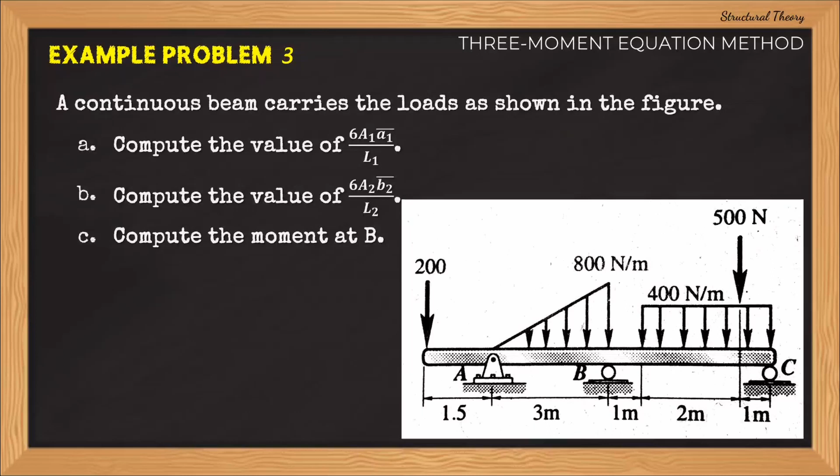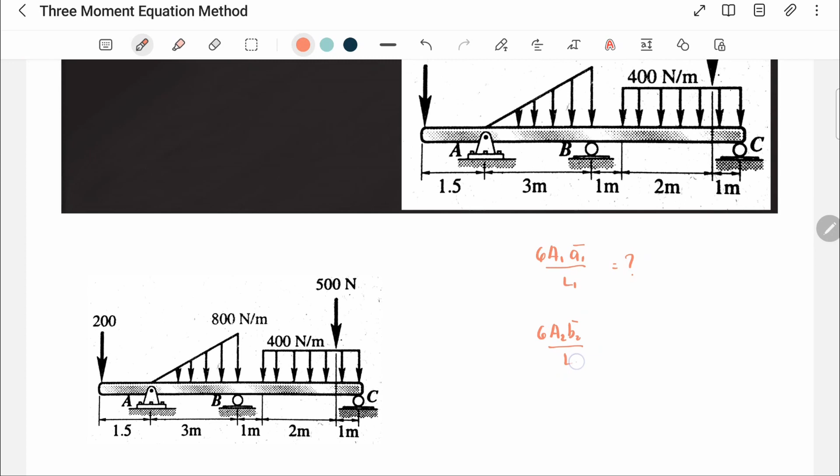So let us solve this problem, guys. Ito nga yung ating problem. Ang una natin kailangan i-solve according to the problem is yung value ng 6A1 bar A1 over L1. Yung pangalawa ay kailangan natin i-solve yung value ng 6A2 bar B2 over L2. Tapos yung pangatlo, kailangan doon natin i-solve yung moment at B.

This is a continuous beam, so meron tayong dalawang span dito. That is yung span AB, ito yung ating first span. This is span AB, so ito yung ating L1. And yung ating second span is yung span BC, so ito yung ating L2.

Kung mapapansin natin, meron tayong overhang dito sa may after sa support A. Hindi natin ito matatawag na isang span, kasi pag sinabi nating span, that means bounded siya dapat ng dalawang supports. So hindi ito span, this is just an overhang.

Ang una natin gawin guys, para ma-solve nga yung moment at B, kasi parang moment at B yung ating final dito na parang kinukuha. Para ma-solve natin yung moment at B, kailangan natin gumawa ng 3-moment equation.

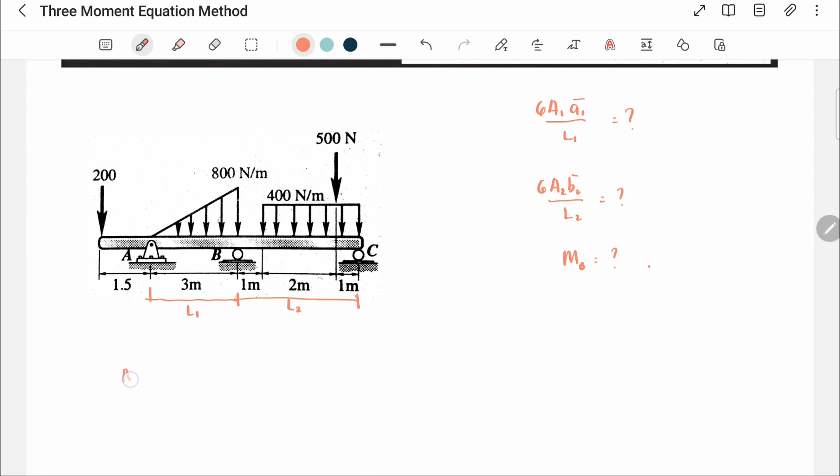Yung ating first term dito para sa ating 3-moment equation is moment A multiplied by L1, plus yung ating second term is 2 moment B multiplied by L1 plus L2, plus yung ating third term is moment C multiplied by L2, plus yung ating fourth term is 6A1 bar A1 over L1, plus 6A2 bar B2 over L2, equal to 6EI multiplied by H1 over L1 plus H2 over L2.

Yung ating unang kailangan kunin dito is yung ating value ng 6A1 bar A1 over L1. Itong term na ito yung ating unang kailangan kunin. Kunin muna natin guys yung term na ito.

Yung segment na tinutukoy niya guys is obviously itong segment na ito. Ito na nga guys yung ating first segment. Kinopya ko lang para hindi tayo maguluhan. Yung ating load dito is a triangular load.

Ang kailangan natin dito makuha guys is yung value ng 6A1 bar A1 over L1. Ang pinakamadali dito, method 1, method 2, or method 3, ang pinakamadali is yung method 1 kasi meron tayong formula na readily available para sa common loading na ito - triangular load all throughout the span. Meron tayong formula para dito, at kung naalala nyo, yung ating formula para dito is equal to 8 over 60 WL cube.

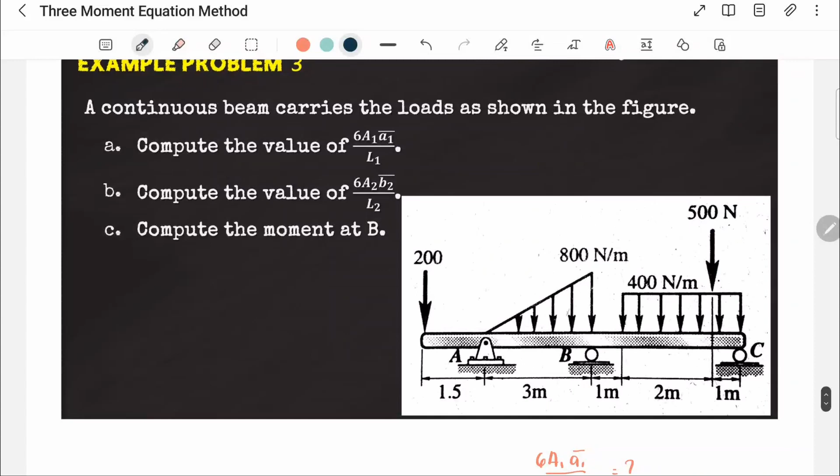I-compute lamang natin guys. 6A1 bar A1 over L1 - yung ating makukuha dito ay 2,880, and this is in Newton meter square. Ito na yung sagot sa letter A. Nakuha na natin yung letter A - this is 2,880 and this is in Newton meter square.

Okay, so dito na tayo sa letter B. Ang kailangan natin kunin dito is the 6A2 bar B2 over L2. Nasa second span yun guys. Kopyahin natin yung second span - ito na nga yung ating second span.

Para dito guys, hindi natin pwedeng gamitin dito yung method 1 kasi walang formula na pwedeng gamitin na directly applicable for this type of loading. Meron tayong uniformly distributed load dito, kaya lang hindi siya all throughout the span. At itong concentrated load, pwede lang natin siyang gamitan ng formula, pero again, para lang yun sa concentrated load. So ang kailangan natin dito ma-compute is again the 6A2 bar B2 over L2.

Okay, so ang gagawin natin dito guys is ihiwalay natin yung effect ng concentrated load sa uniformly distributed load. Ang ating gagamitin dito is yung method 3 kasi mas okay gamitin compared sa method 2, para hindi na tayo nagko-compute ng mga vertical reactions. Sandali, papalitan ko muna ng drawing ito para hindi magulo yung ating figure.

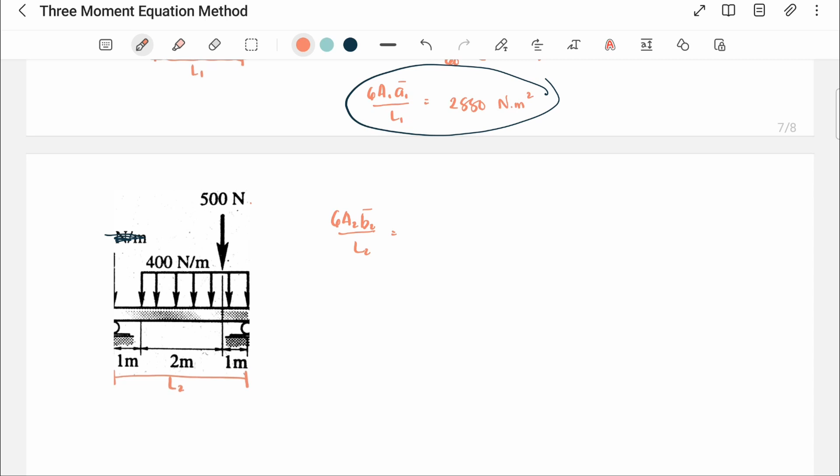So ayun na nga guys, ito nga yung ating figure, pinalitan ko lang siya. So ito yung ating span 2. Again, this is our L2 and this is equal to 4 meters.

Ang gagawin natin dito is gagamitin natin yung ating formula para sa 6A2 bar B2 over L2, ating gagamitin dito is PB over L multiplied by L squared minus B squared. Pero since dalawa yung atin ditong load, meron tayong concentrated load at meron tayong uniformly distributed load.

So yung 500 Newton na concentrated load, ida-direct natin siya na substitution. Pero yung 400 Newtons per meter ay gagawin natin siya, i-integrate natin siya. Kukuha tayo ng strip at saka i-integrate. So bali ganito yung mangyayari guys, PB over L, L squared minus B squared, ito is para sa concentrated load, plus integral of PB over L, L squared minus B squared para naman doon sa uniformly distributed load.

Okay, so unahin muna natin yung ating concentrated load. Ang ating P dito is 500 multiplied by B. Ang ating B dito is yung 1 meter. So 1 divided by L which is 4, multiplied by 4 squared minus 1 squared.

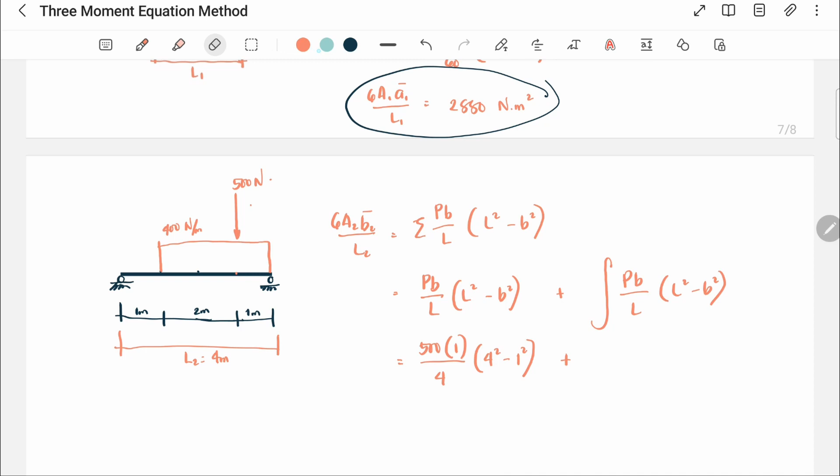Plus, ngayon, ang gagawin naman natin is kukuha tayo ng strip sa ating uniformly distributed load. So ito yung ating strip. Itong strip na to ay tatawagin natin y ito, at ito is of course the dx. Itong x na to, bali ito is equal to 4 minus x.

Okay, so ano ba yung y? Tama bang sabihin that y is equal to 400? Bakit? Kasi nga, uniformly distributed load man to, hindi natin kailangan mag-ratio and proportion para makuha si y in terms of x. So yung ating y is still 400 kasi yung ating height nitong load na to is constant and it is 400.

So bali guys, yung ating P dito, equivalent na P nitong ating strip, vertical strip, is equal to y dx, or that is equal to 400 dx. So again, yung 400 dx is itong equivalent na load nitong ating strip. Okay, so bali guys, all we have to do is integrate.

So integral of, yung ating P dito is 400 dx multiplied by B. So yung ating B is 4 minus x, L natin is 4, then L natin is 4 squared minus 4 minus x squared. So kailangan nating maglagay ng limit. Yung ating limit of course is yung ating x. Take note, yung ating uniform distributed load ay nag-start lamang siya dito sa point na to at nag-end dito. So yung ating limit is 1 until 4.

Okay, so all we have to do is i-compute muna natin itong nasa una. Itong nandito sa una is 1,875 and this is in Newton meter square, plus itong pangalawa. Itong pangalawa natin is 5,175 and this is in Newton meter square pa din. So we are going to add that and that is 7,050 Newton meter square.

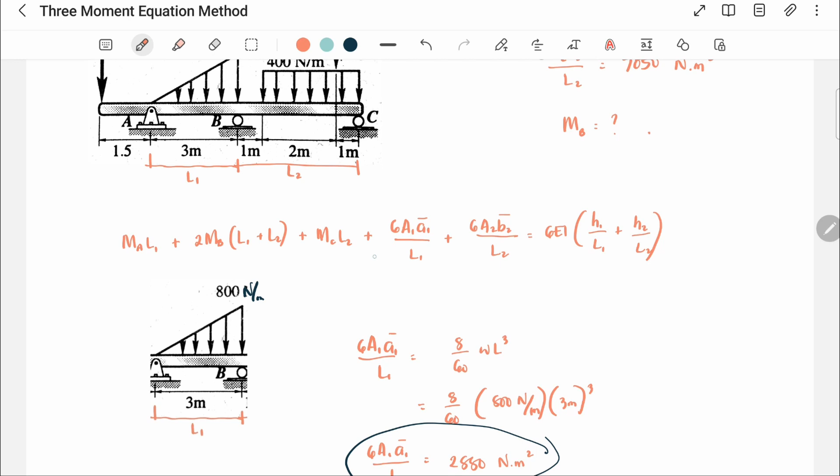Okay, so isa na lang yung ating kailangan ditong i-compute, that is yung moment sa B natin. Balikan natin guys yung ating formula, yung ating 3-moment equation kanina. So that is moment A multiplied by L1, plus 2 moment B multiplied by L1 plus L2, plus moment C multiplied by L2, plus ito at saka ito na nakuha na natin.

Okay na ito guys, nakuha na natin ito at saka ito. Take note na yung H1 at saka yung H2 ay mangyayari lamang na magkakaroon sila ng value kapag nagkaroon ng settlement sa mga supports. Nasabi ko yan sa pinakaunang video natin ng 3-moment equation. Magkakaroon lamang ng value yung H1 at H2 kapag meron tayong settlement.

Kasi yung H1 is the vertical distance between the left at saka sa middle support, at yung H2 is the vertical distance between the right and the middle support. Ayun, so ang nangyari dito guys is walang minention sa problem na nagkaroon ng settlement. So in other words, H1 at saka H2 natin ay 0.

Kung H1 at saka H2 natin ay 0, ibig sabihin 0 itong nandito sa loob ng parentheses, and therefore 0 yung lahat ng nandito sa may right side. Nasabi ko din to kanina sa first part ng 3-moment equation na kapag yung ating beam ay nag-end dito sa may support mismo, sa may roller o kaya sa may hinge, ang ating moment dyan ay magiging 0. So ang moment C natin is 0, kapag 0 yung moment C multiplied by L2, ito ay magiging 0 na term.

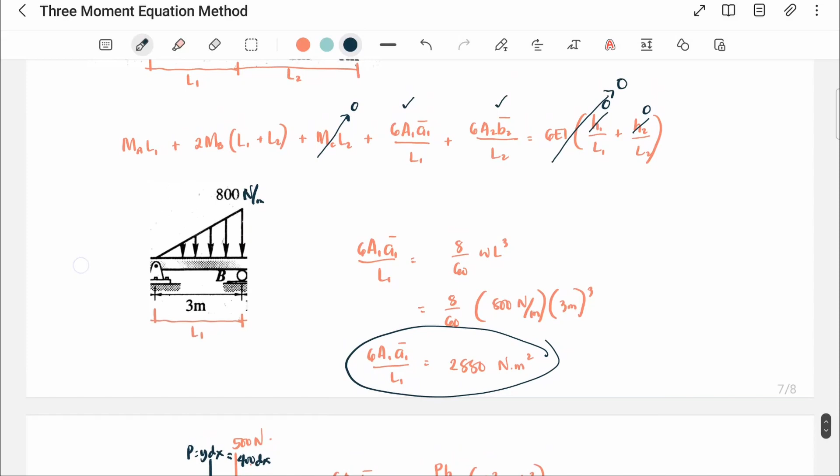Bali guys, ang matitira na lamang natin na term sa equation ay: moment A, L1, plus 2 moment B multiplied by L1 plus L2, plus 6A1 bar A1 over L1, plus 6A2 bar B2 over L2, equal to 0. Ito na lang guys yung ating natira, kasi yung iba ay na 0 na.

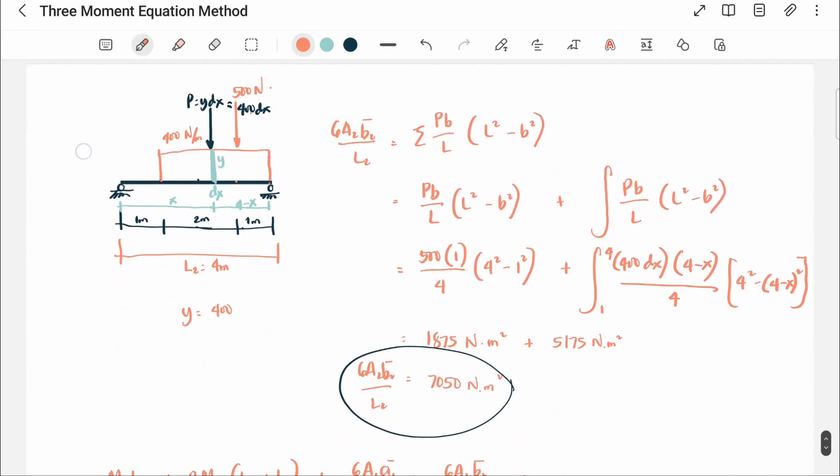Yung hinahanap natin sa pangatlo is yung moment sa B. Meron na tayong value ng L1 tsaka L2. So ang atin na lang problema, para makuha natin si moment sa B, kailangan natin ng moment sa A.

Take note that if we cut here, and then we isolate the left side. I will cut here, tapos i-isolate ko yung left side. Ang ginawa ko, kinat ko sa may support A mismo, tapos in-isolate ko yung left side. Hindi ko na sinama sa drawing yung ating support kasi dyan sa may support A ko siya kinat, before support A ko siya kinat. Ang mangyayari nito, kapag kinat ko siya tapos in-isolate ko yung left side, of course may lalabas dito na moment reaction. Yung ating moment reaction, kapag positive, kapag nasa left side tayo, ito yung ating positive sense ng moment. Sige nga, i-compute natin yung ating moment A.

Let's have summation of moment about A equal to 0. Let's assume counterclockwise to be positive. Bali, ang mangyari dito: moment A is positive sa direction na yan, then plus 200 multiplied by 1.5, equal to 0. Mangyari, moment A natin is equal to negative 300 Newton meter. Meron na tayo guys value ng moment A and that is negative 300 Newton meter. Ito na mismo yung sign na gagamitin natin, kasi nga kapag nasa left side tayo, yung ating positive sense ng moment is counterclockwise, so kapag negative yung ating result ng moment, that means negative yung moment na yun.

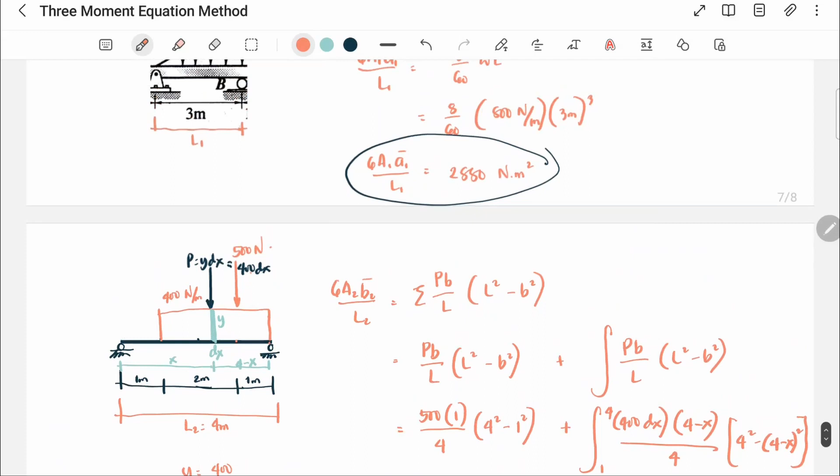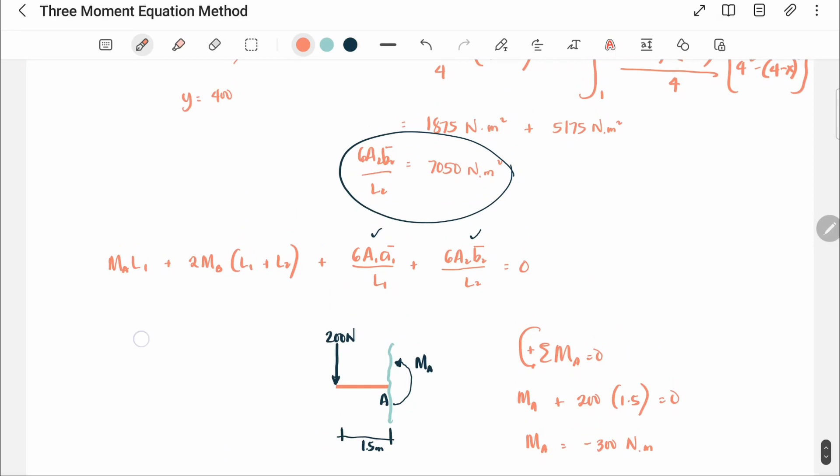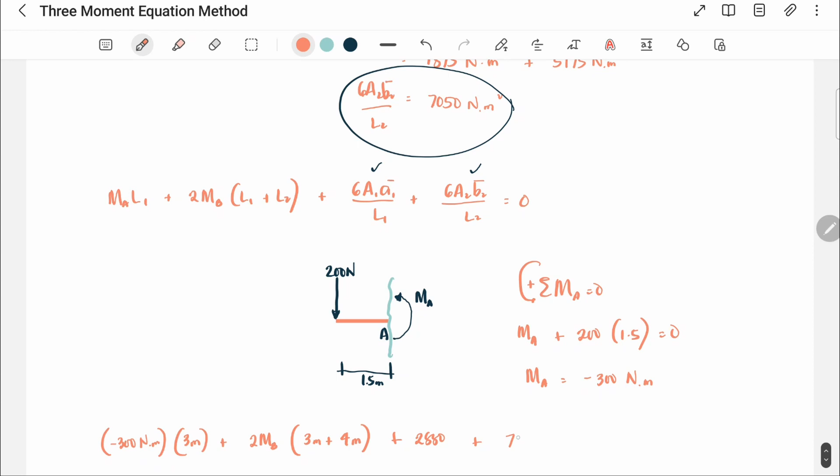Okay, so all we have to do is to substitute that to our equation. Mangyayari dito is magiging negative 300 Newton meter multiplied by L1. Balikan natin yung ating L1, that is 3 meters, plus 2 moment B—ito yung hinahanap natin—then L1 is 3 meters plus L2 natin is 4 meters, plus 6A1 bar A1 over L1. Nakuha na natin to kanina at ang value nito ay 2,880, plus 6A2 bar B2 over L2 which is 7,050, equal to 0.

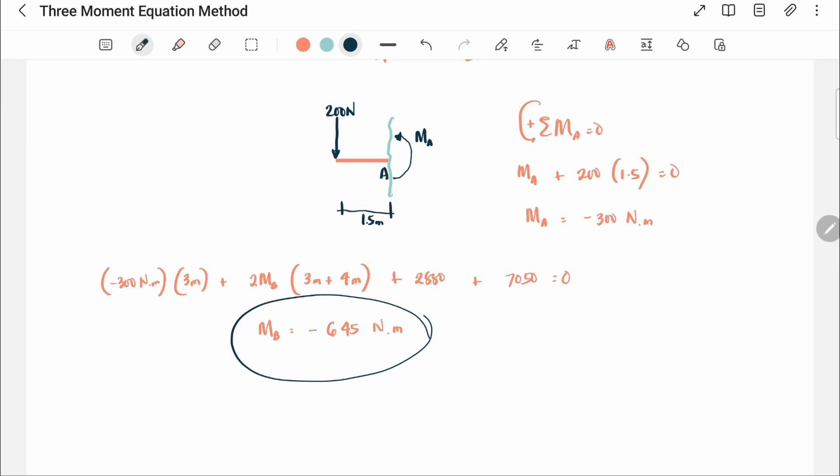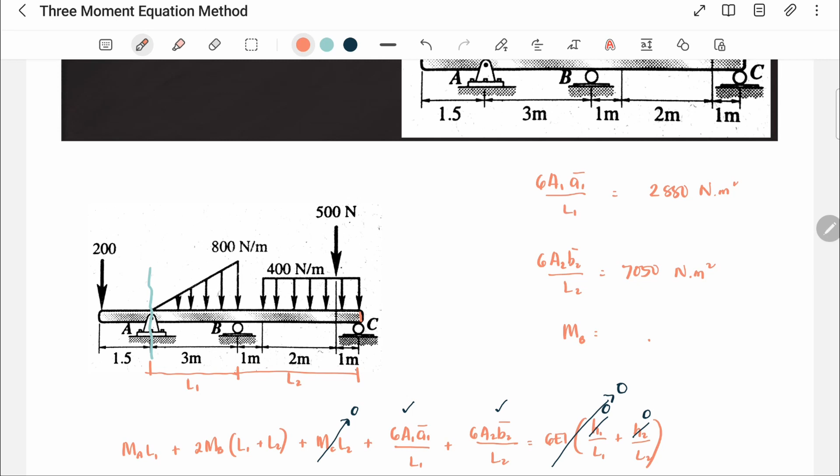Ayan, sa ating 3-moment equation na to, ang natitira na lamang na unknown is yung moment sa B. Makakompute natin ito, and the moment sa B is equal to negative 645 Newton meter. Ito na yung sagot sa pangatlong tanong, ang sagot natin is equal to negative 645 Newton meters.

Ayun, nasagot na natin guys lahat ng mga tanong dito sa problem na to. Sa next na video, itatry nating sagutin itong problem na to, dahil dito sa problem na to, meron na tayong settlement. See you in the next video.